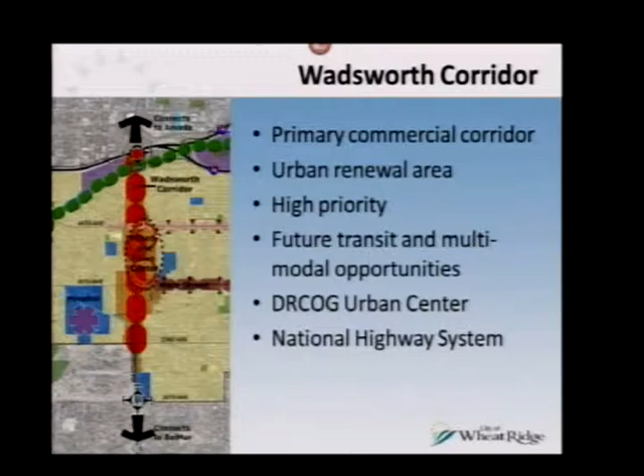So the Wadsworth corridor - this is why we're working on Wadsworth as opposed to the other streets we have - these are all the different reasons. I'm not going to go through all those, but it's a big deal for the city, it's a big deal for the region. It's the only road on the west side that goes as far north and as far south as Wadsworth does.

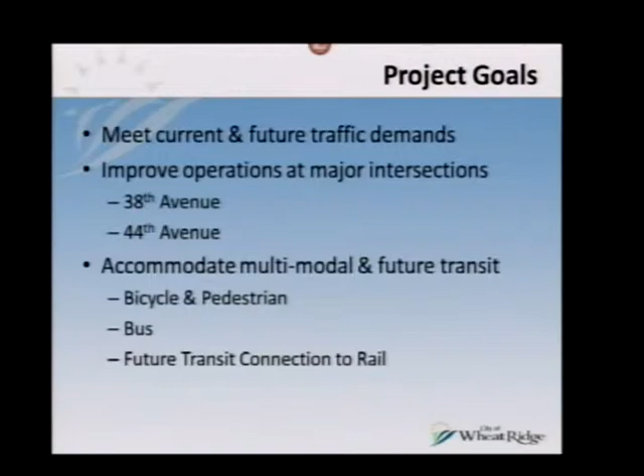The project goals - these are the things we hope to do - is to meet the current traffic demands, which is a problem, and also the future ones. We want to try to get our intersections working better. And we want to try to do something that Wadsworth does a really bad job right now, which is accommodating folks on bicycles and pedestrians, and also try to get the buses working a little bit better.

How many of you guys have been stuck behind a bus on Wads before? I have, every day. And also we've got rail lines to the north and the south of it - trying to set up a future connection along Wadsworth between those two rail lines. So if someone wants to get from Arvada down to the Federal Center, they don't have to ride all the way to downtown and all the way back out again. It's maybe doing something along Wads to give them an option to go straight south.

So the funding, it's a federal project. There's about just over $600,000 worth of federal funds in this, and the city's got just over $500,000 projected to use. Now the contract from the consultant came in at just over $1 million, so hopefully we've got a little bit of room there if something comes up, and hopefully we just don't spend it, we get to keep it.

So the next steps we've got on this - the team, between this meeting and the next meeting, which will be in October, the team's going to be working on different alternatives. What are the different things we could do to Wadsworth to try to fix it? We're going to come back in October and talk with you all about that.

And we'd love to have you show up then also, because we really do want public feedback on the alternatives as we move forward with this thing. We're going to finalize the alternatives after that meeting, and in February we'll come back again to City Council and to the public to talk about what those final alternatives are.

We may have a whole list of alternatives, and we pick a few things out of each one and make an alternative out of those and discard some of the other things. So we're hoping to have some really good alternatives that come out of this.

And then we're going to finalize the PEL and hopefully go to City Council on May 11th of next year to get the PEL adopted, at which point then we can start trying to maybe bite off some of those early action items. So I'm going to run through the slides real quick, the boards that we have over there, just to give you a preview of what's there, and then definitely go look at those afterwards if you're interested in a particular one.

So this is a definition of what a PEL is, and we'd love you to go read that to see if you can understand what we're trying to do with our PEL. The little book on the bottom left is actually the CDOT handbook for how we do PELs in Colorado, versus some other states that might have somewhat different regulations and things.

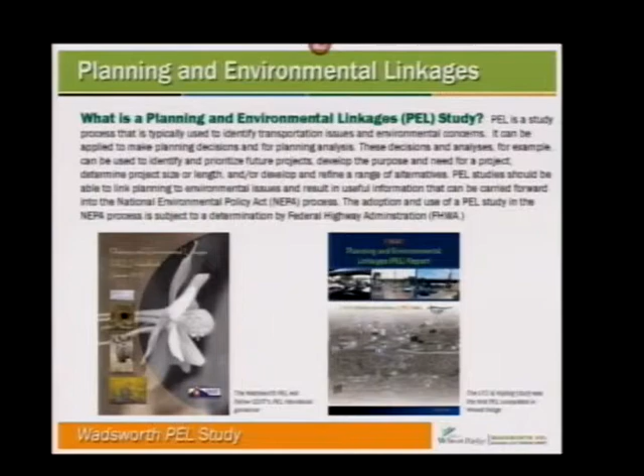And then the thing on the right is actually a PEL we've already done in town. We did one for the Kipling I-70 interchange. That was a project that CDOT took the lead on. So we already have one PEL in town, and that's available on the website if you want to go look at it. It's under Public Works Long Range Planning.

This is the PEL process. I'm not going to spend any time on this slide at all, but it's over there if you want to go look at what the process is we're going through on this.

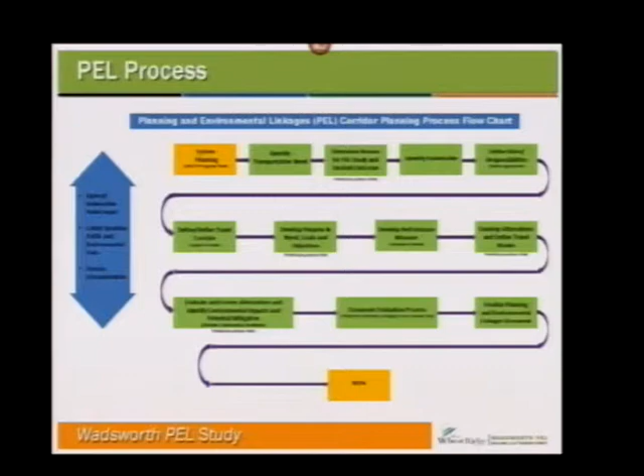This is all the planning history that has happened on Wadsworth within the last 10 years. So this isn't the first time we've studied Wadsworth. Most of the other documents have been more on the land use side, what's sort of happening outside the street. This one's more focused on what's happening to the street and then also how that impacts what's happening outside the street. That board's over there also.

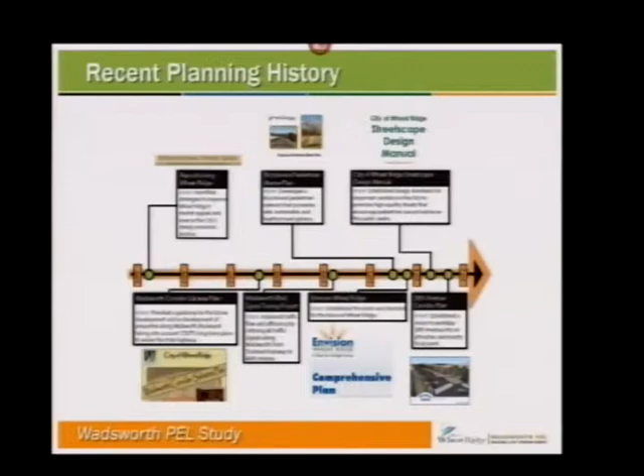The purpose and need, this is our draft purpose. The reason we're doing this is our draft purpose. We would love for you to go over to that board and read that, and if you have any comments, write it on a sticky note and stick it on there. This is the thing that guides the entire document, so we really want to make sure we get this right.

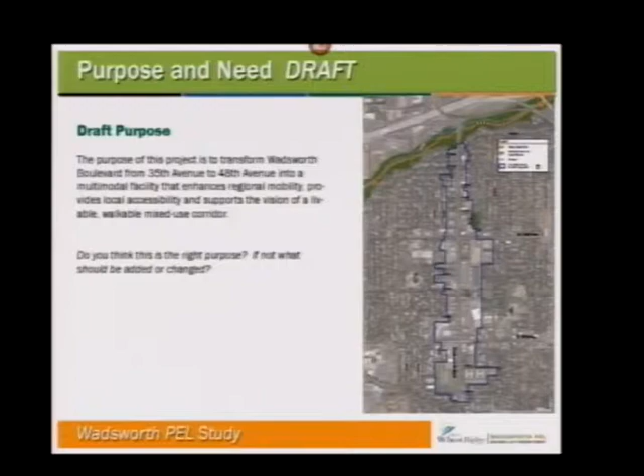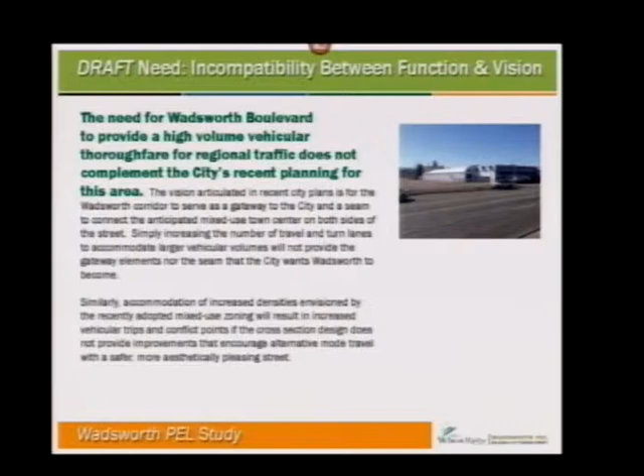The rest of these, we have several needs that we'd also love to have comments from you guys on, that function and vision. Wadsworth doesn't function real well now the way it is, just as a car mover, and it certainly doesn't fit our vision of taking care of bikes and peds and all those things.

We don't have adequate vehicle capacity, as you guys see this every day. If you drive Wadsworth, the cars are backed up a quarter mile or more at times.

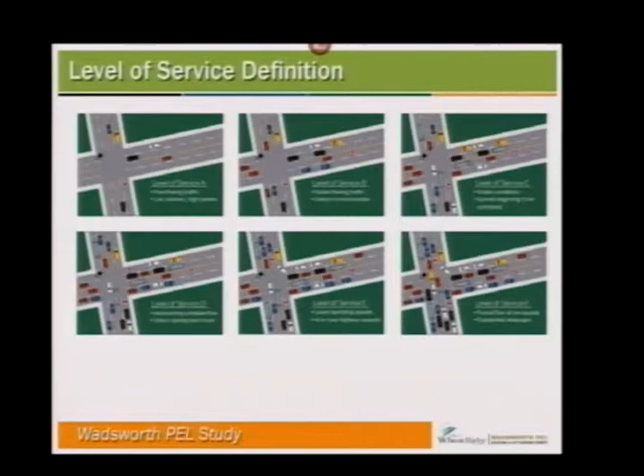This is just a slide that's right in the middle. It talks about level of service, which is how traffic engineers relate to how bad things are. A is the best, F is the worst. We think we're often F on Wadsworth because things are so messed up. This gives you a pictorial idea of what we mean when we say we're shooting for a level of service D.

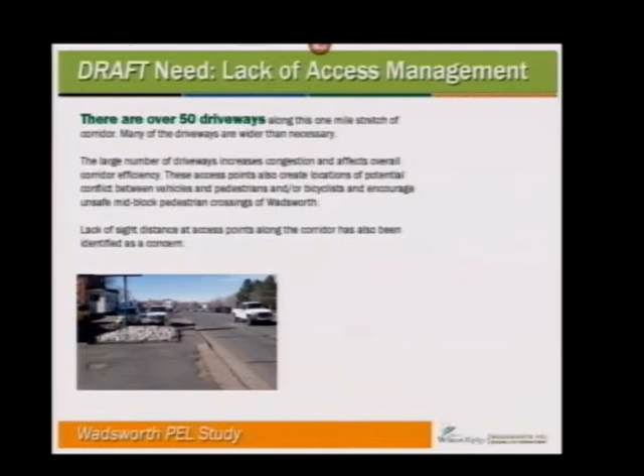Another issue is the lack of access management. We've got lots and lots of driveways on Wadsworth that are fairly unregulated, and people can just zip in and out of those. It also creates a real conflict for pedestrians trying to walk down Wadsworth, because you never know if a car is going to come in without signaling.

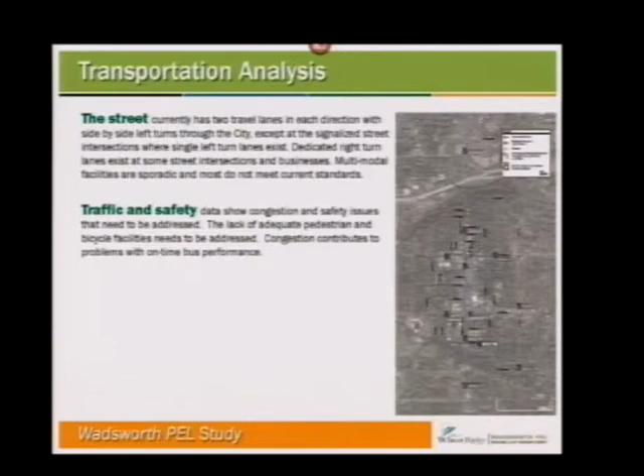This just shows the transportation analysis we're doing. These are the signals we're looking at, and it also has some of the traffic counts we've done so far. This talks about our bicycle and transit network.

This is our preliminary, very preliminary environmental findings. The red boxes you see up there are historic properties that we think we've identified as potentially historic. We also have some other things highlighted on this slide if you're interested in that sort of thing.